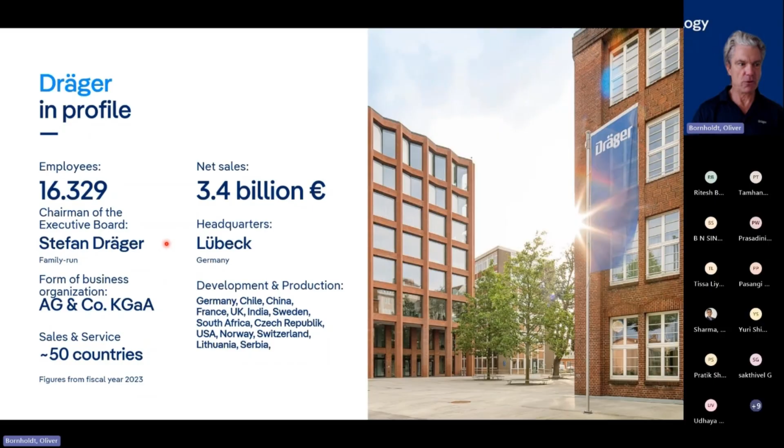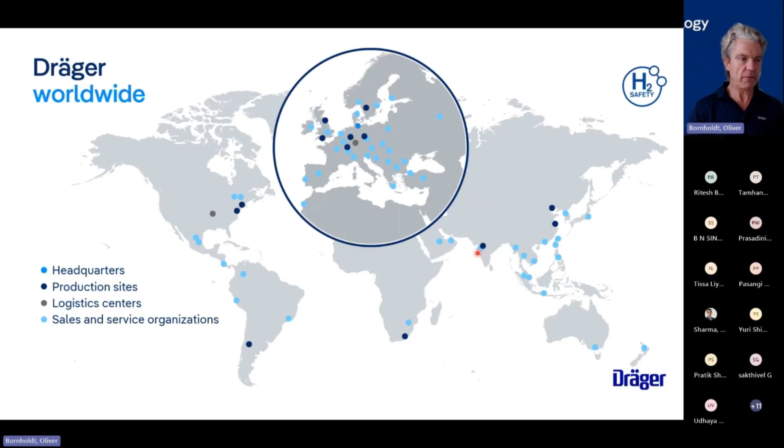So where am I currently? Here's Europe, here's our headquarter close to the Baltic Sea in Northern Europe. As you can see on this graph, we have a lot of production site logistics centers and sales and service organizations, also in Mumbai, taking care of Sri Lanka as well from India, and we are very active in almost all continents.

So what you can expect today, roughly in 45-50 minutes: I give you some overview about the markets, how we see the new upcoming market, and some statistics as well. Then we dive into the production, the hydrogen production, mainly electrolyzers - what is it, why is it so challenging, what do we see - and then some codes and standards, so what needs to be known to really maintain and set up a safe infrastructure.

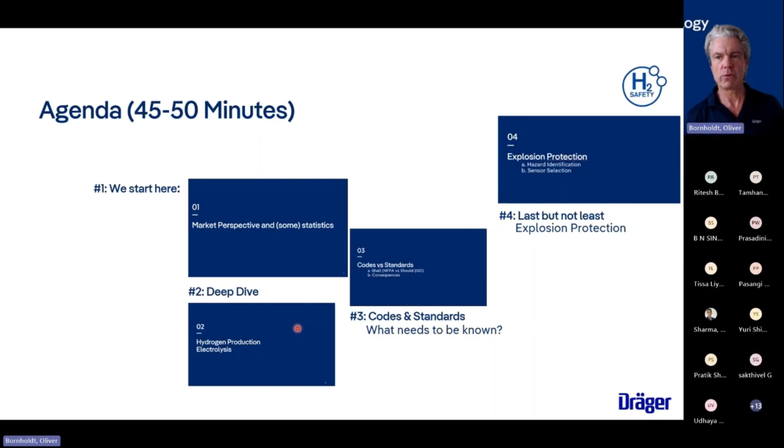And at the end, one thing is what needs to be known, and the last thing is what needs to be known to really make it safe. That means also from the perspective of a hydrogen production facility, what needs to be known to be safe in terms of explosion protection.

As I said, market perspective first - let's dive into how we see the market. So when we look here, let's say in the middle, this is what we are talking about today. We see the main production for hydrogen is electrolyzers. There's also natural hydrogen underground deposits that raise up in some continents, but the major part will be electrolyzers. And around that, a total new ecosystem is currently evolving.

We know this from the past, from centuries away, when oil and gas really influenced our whole industry. Hydrogen, ammonia, methanol will take over parts of it, not everything, because we are still, since decades, dependent on oil and gas. This is for sure. So what we see here is really the whole part of mobility, which is really difficult to decarbonize. One thing is for sure: electromobility, when we talk about trucks, cars, and so on. But it will not solve the whole game.

We see a tremendous amount of projects in the fuel cell business, which also has challenges in terms of safety for sure, but this is manageable. Then we talk about the big part of feedstock for industry, especially the steel industry, which is really looking with big investments deeply into decarbonization. So that means direct reduction furnaces currently deployed.

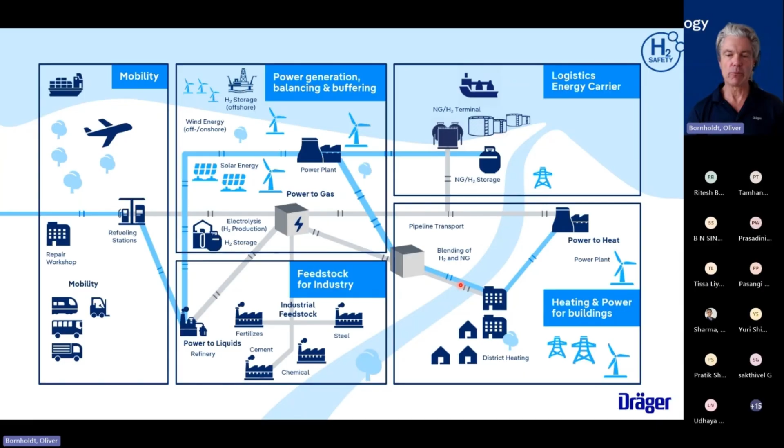The whole logistics around that, especially when we talk about ammonia, shipping around the world is currently a thing that pops up in a lot of projects. And then last but not least, district heating, where we either use natural gas pipelines - we have pilots here in Europe as well - and blend this with hydrogen, or on long term, use hydrogen only. But this is on a long term basis.

So how much and how many projects do we see? Currently, I have with my team here quite a good overview of roughly 1,200 projects, and this is really going up a lot.

You could say, okay, a lot of these projects are really long term, and we don't see them concretely. But this is not true.

We have a database here in the background and a partner who helps us. You see here how concrete they are when we talk about request for quotation, which is a good indicator that in '24 and beginning of '25, a lot of these projects are really going active, and they are huge in terms of total investment volume.

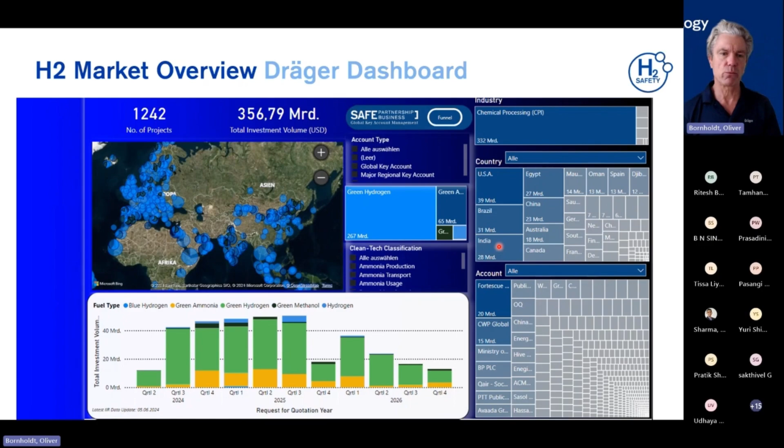So it means really around the world. I was recently in South America, in Chile as well. We see big investors like Fortescue from Australia investing a lot around the world, and India. What we see in this whole region in terms of who is really investing and looking into projects, India and this whole region, including Sri Lanka, is really looking very closely into that. So that gives us a clear indicator: this is not only a buzzword, this is really reality. This is a new reality.

Some statistics - our goal as Dräger is really looking into safety, because this is one of the biggest threats and challenges. When we look at established industries like petrochemical industry, safety is in the genetics - it's part of company culture. When we talk about new industries, also new groups of people who are not so safety aware, that's where education starts.

The sensitivity about new substances, new technologies, definitely needs to be very present. This is currently where and how we are working on it.

There are organizations like the European Industrial Gas Association, which really looks into hydrogen-related production, storage, handling, and road accidents. They analyzed that, and 21 of these accidents - that's 10% - have happened in the last decade. And for sure, purely from the statistics, it will be more because currently the projects are going live in hydrogen.

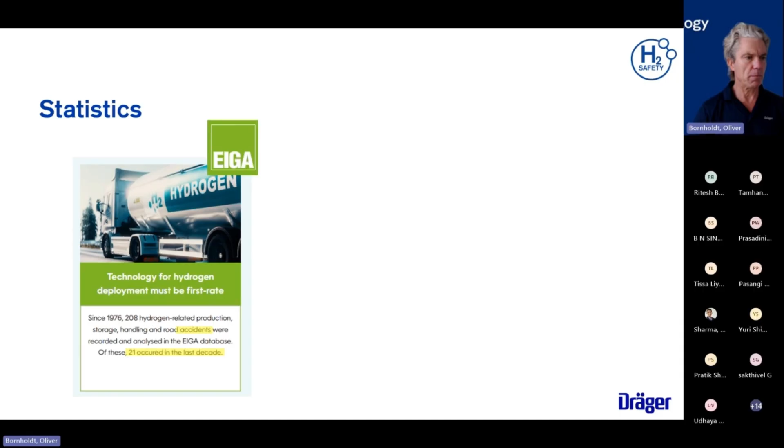Oliver, you went on mute. Oh, now I'm back. I'm sorry.

Thank you. Hydrogen tools, hydrogen safety panel, for decades has really been looking into very detailed analysis. This is what we can take out of these statistics, and taking this information to give you an even better service.

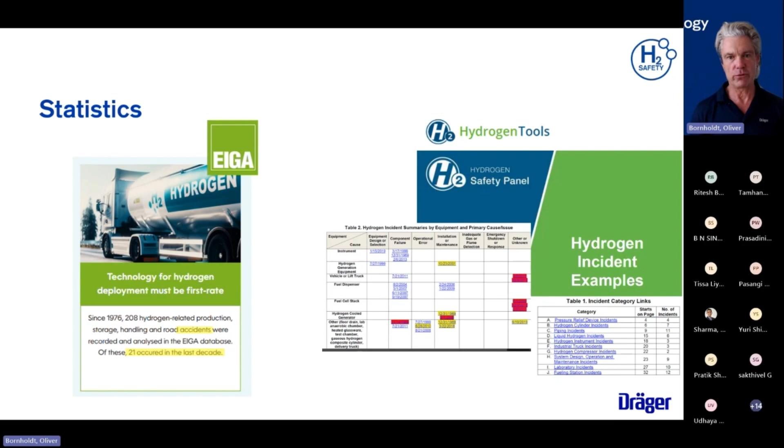Main reasons for hydrogen incidents: we are working with and are a member of the Center for Hydrogen Safety, a non-governmental organization, including lots of companies who have been working in this industry for decades.

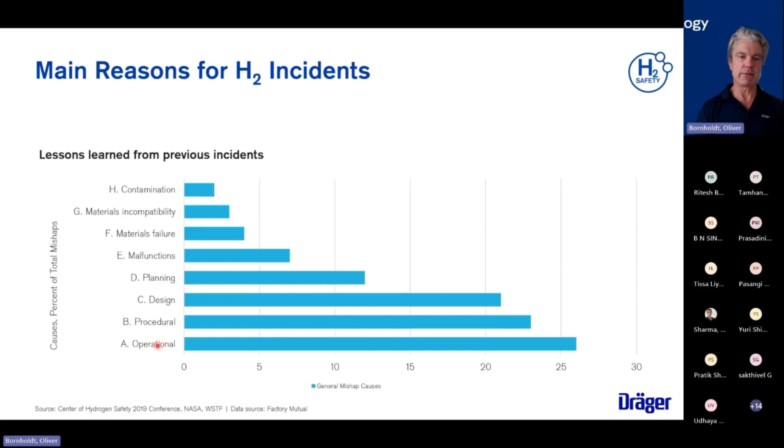Looking a little deeper into that - where in the process it happened - we see it really in the operational part. So when it's going live, when we're doing regular maintenance and procedural operations. But here's also a kind of pattern where we have to look in.

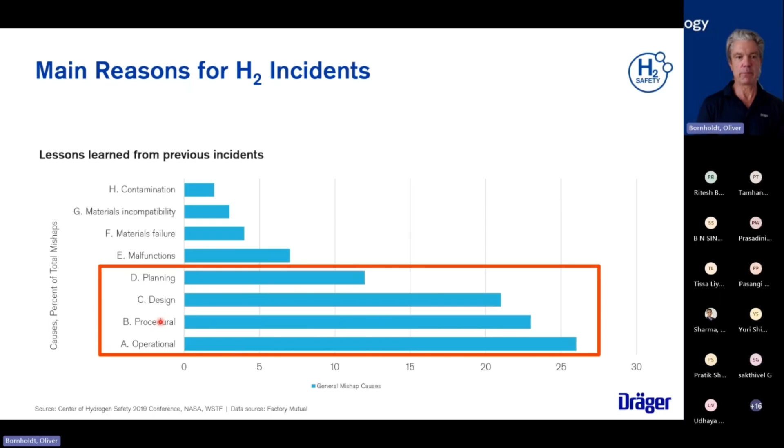You could say, okay, here especially in category A, which is a fourth of all causes - and looking at A, B, C, and D, there's a pattern. This is people-related: either in planning and designing, in maintenance, in ramping up. And this is more related to material, which is also important to know - what kind of materials we have to use.

Failure is also part of maintenance, and hydrogen has some specific behaviors like embrittlement - you may know this. That means also looking into choosing the right steel quality, the right fittings, discs, sealings and so on - it's very important to know that.

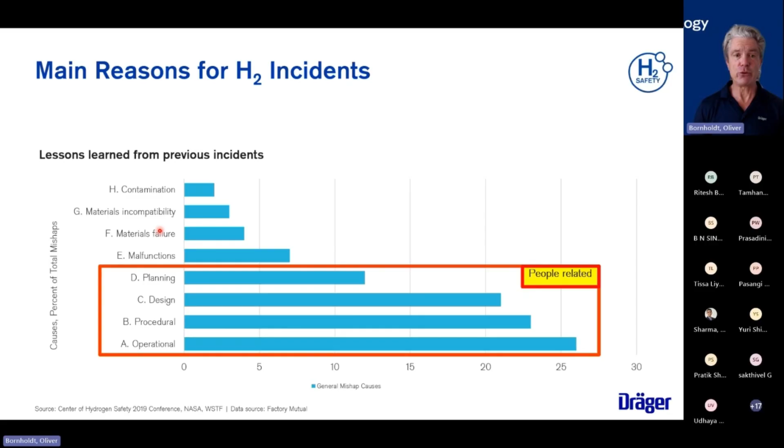Just to give you an overview here about our mission: it's really to educate people so you know what you have to know to start your safe operations.

Interestingly, I'm in contact with a lot of insurance companies because there's an insurance perspective as well. These are big insurance companies who will be in your operations later. There could be local ones as well. I just chose here one, two, three from Europe, which are large insurers, and they see this as well.

I've been invited to some of these risk management conferences in insurance companies, and they're telling the same story: currently, if the risk and the process is not fully understood by the people, also from this perspective, the insurance rates will have to be raised. So that means if you could show that you did everything which is technically available, and this is also your liability at the end, and you could show a proper safety concept which is state of the art, then the operational cost in terms of the insurance rate will go down. And this is where these guys are really looking in.

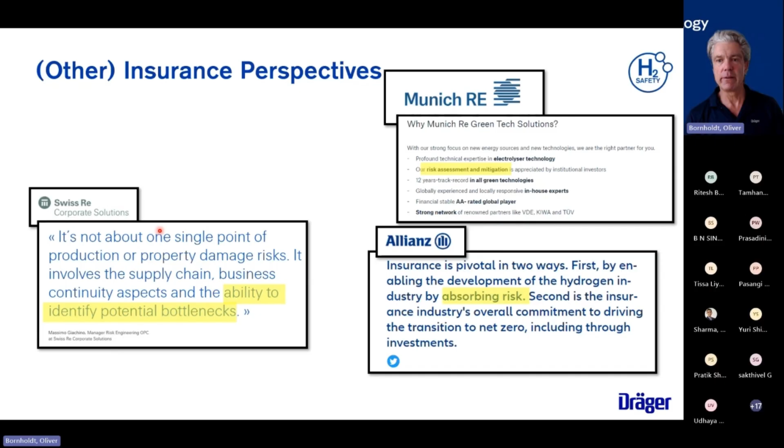The biggest insurer worldwide, FM Global, has published for years a so-called property loss prevention data sheet. There's a new revision from January this year which gives good recommendations on what needs to be known and what needs to be used. There's also a special section about flammability of hydrogen, so there's a lot of new good information. And as you can see, this is not from an industrial peer organization, this is from an insurance company. So that means they take it very seriously as well.

We want to talk today about hydrogen production, that means electrolysis. A little bit going into the history, because this is not new.

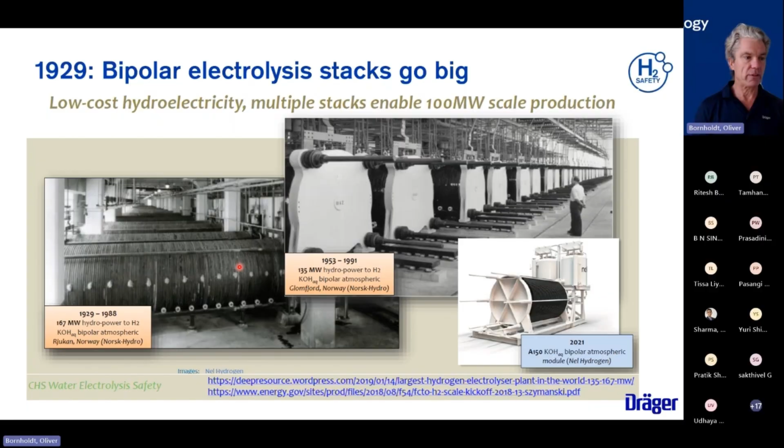As you can see, these are pressed stacks, with membranes in between. And for sure, degradation is still today one of the biggest risks in electrolyzer technology, because when we talk about proton exchange membrane, you may have internal pressures up to 30 bars, so differential pressures, temperatures between 40 and 90 degrees, which is not dramatically high. But for sure the biggest risk in PEM technology, and with alkaline electrolysis as well, which is a little bit different in the technology part, is crossing H2 into O2 and O2 into the H2 stream. And this, as we know from the school experiments, is very dangerous.

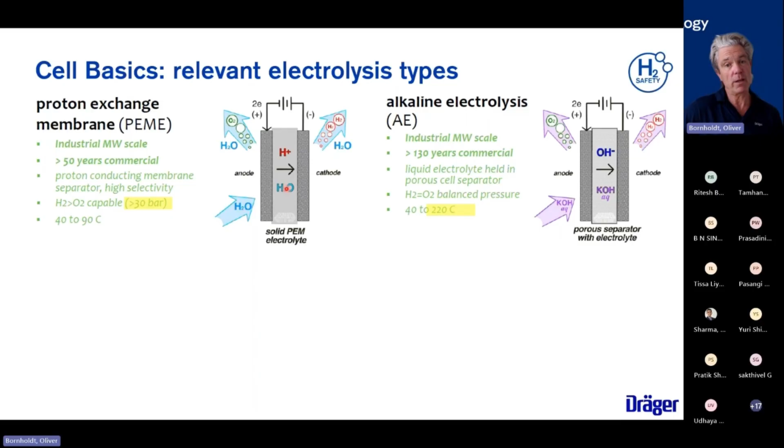So these kinds of things are the biggest technology challenges that all electrolyzer OEMs are currently facing, and we are in contact with dozens of them, really looking deeper into that. But there are new technologies currently in preparation, I would say, for example solid oxide electrolyzers, which is also not new, developed in the 80s, but compared to PEM and compared to alkaline, this has a quite low market share still, but it's going larger. And for example, anion exchange membrane as well, so this will be scaled in the future, and there are a lot more technologies currently being developed.

I'm in contact with some startup networks, so this is very promising for the future, that there will be a lot more, maybe safer technologies as well. But currently, the majority, I would say 95% of all large installations, are either based on alkaline or on PEM. You could ask us, hey, when to use what? There's a rule of thumb. I'm not really a deep specialist here because my home turf is safety.

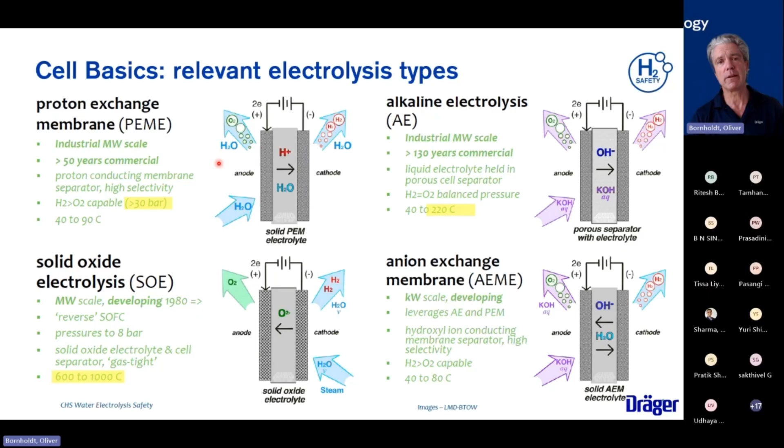PEM is mainly used when you expect shifting energy input, let's say from wind or solar, whereas alkaline is mainly based on having a very stable electrical input. This is the main difference here.

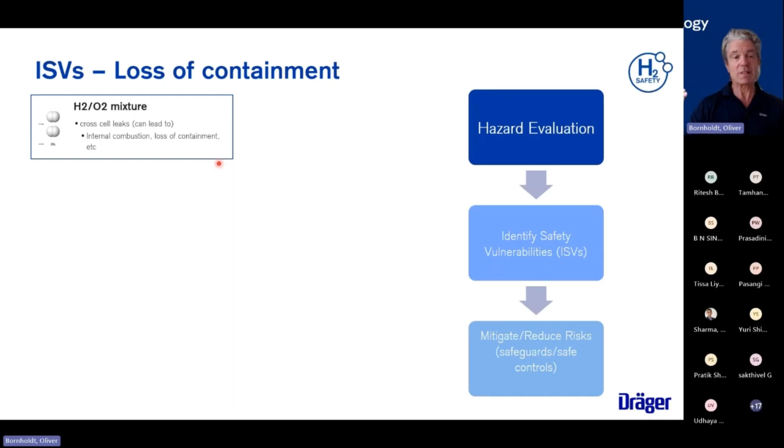So loss of containment, what are called safety vulnerabilities? First of all, you have to identify the hazards. Hazards, as I mentioned, can be an H2/O2 mixture in the electrolyzer, meaning a cross-cell leak, which can lead to internal combustion and loss of containment, because this is something we want to produce, not lose. Another hazard could be overpressure, which can lead to failure of the vessels and components, and loss of containment as well.

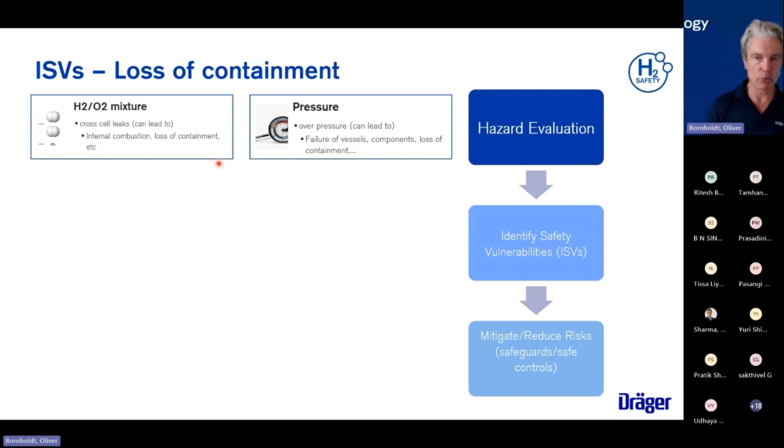We have a liquid electrolyte that can cause corrosion in sealings, in fittings, and chemical burns. We can also have an unintended H2 release into the air, so that needs to be controlled as well.

Either you have a controlled environment for the electrolyzer, like a container as seen in the small picture, or maybe in a building. Some installations I've seen are outside, but there are pros and cons in terms of durability and atmospheric weather or climate conditions on an electrolyzer. So both have pros and cons.

Oxygen release for sure. There is an increased propensity of combustion because you produce hydrogen, and in some installations I've seen the oxygen is just released. If there would be an unintended H2 release, a purging, or an overpressure, it could also cause a kind of atmosphere which is then highly explosive.

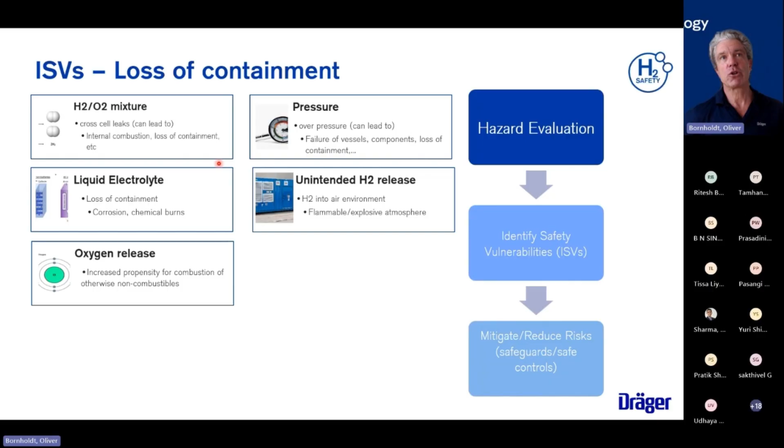Because hydrogen has one big challenge: a very, very low ignition energy. It's over 10 times lower compared to natural gas.

Low temperature can happen as well. Water freezes and expands in some areas - maybe not in Sri Lanka, maybe not in India, but here in Europe, Northern Europe, over winter times when it's an outside installation, it can happen. Electricity, for sure - we talk about high power volumes here, high temperature as well. This is what we also see in outside temperatures, for example in the Middle East.

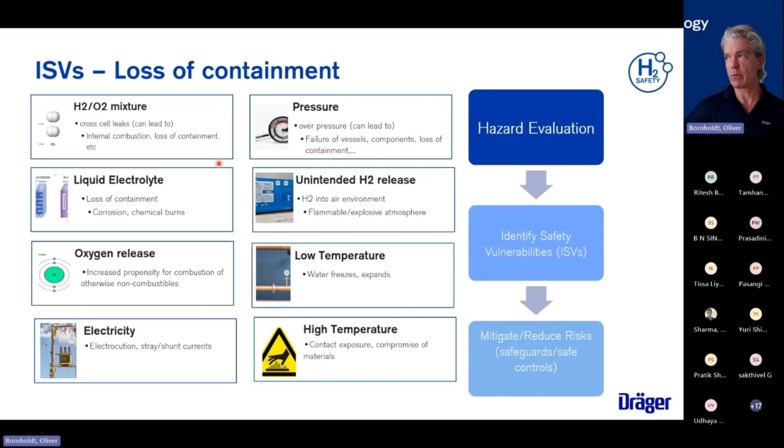Bypassing now away a little bit from the technology - what needs to be known in terms of codes and standards? What is already regulated? What needs to be regulated? There's also a big difference depending on where you get the systems, where you want to install the projects, and with whom you're working together. So there's a big difference between NFPA, North American standards and codes, and ISO and IEC standards for the rest of the world. I will talk a little bit about the consequences of that.

But overall, we all have a duty to protect health and life. Why am I saying that? This is based in your law, also in your national laws. And from a company perspective, at the end, the owner of the company, the CEO, is liable if someone gets hurt or even worse.

So there are basic laws which need to be known, legislations concerning health and safety at work. This is legally binding stuff that you definitely have to know - accident prevention regulations, collective agreements, and so on. Then there's the state of the art: standards, principles, norms like ISO, NFPA, technical rules about hazardous substances, governmental action plans as well. This is given out, and this needs to be known. This is not an excuse not to know about it.

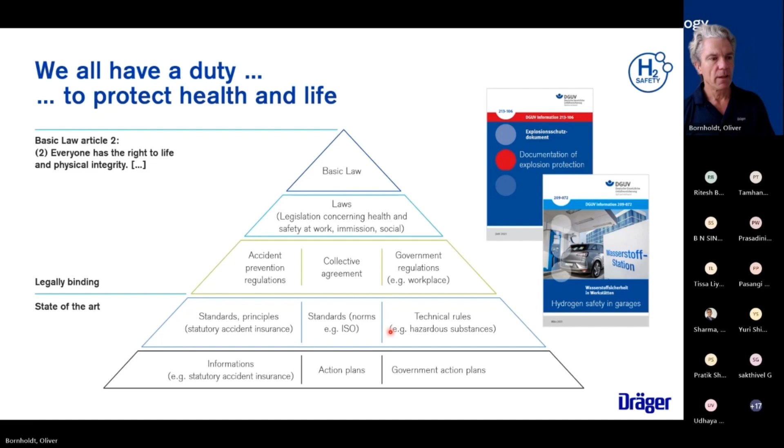The good thing is there's help. When we just look at standards and codes across the whole value chain in the US, you could say, okay, why the hell do I have to take care about US standards? You may get equipment in the projects, and this is normally sourced internationally via, let's say, EPC companies.

That means it could be that these OEMs are really used to using, for example, NFPA. I will come a little bit later into what kind of standards are applicable here, NFPA standards and codes. So when we concentrate on this left part of production, the CSA standards are applicable, UL, and for sure, when we talk about sensors and detectors at the end, NFPA will play a very important role.

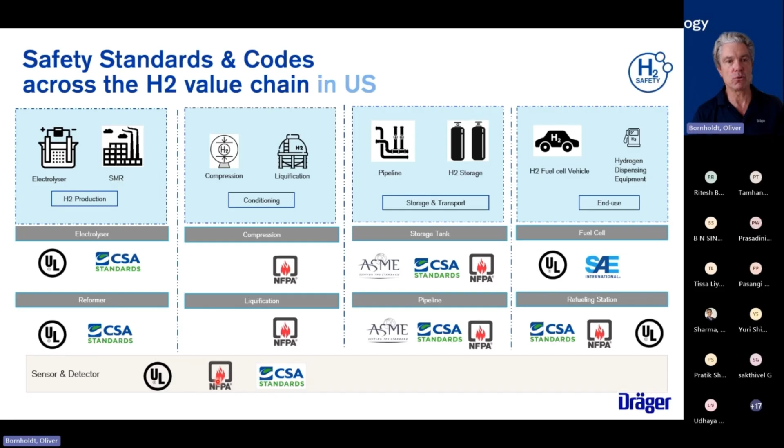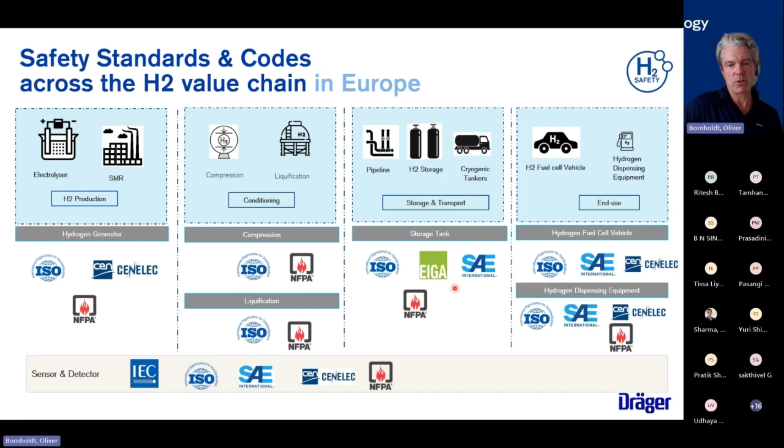Internationally in Europe, or other continents as well, ISO and CENELEC play a role. And as I've mentioned already, the European industrial gas associations have given out codes, standards, and regulations and guidelines as well, which help a lot to plan a proper safety process.

Looking a little bit deeper into one specific international standard, the ISO 22734, which is dedicated to hydrogen generators using water electrolyzers. This is something you definitely have to put under your pillow and look into. This is really a consensus built via multinational ISO processes, latest published in 19, and there are addendums currently being worked on, with working groups looking into additions especially for new applications and new technologies that will come up in the next years.

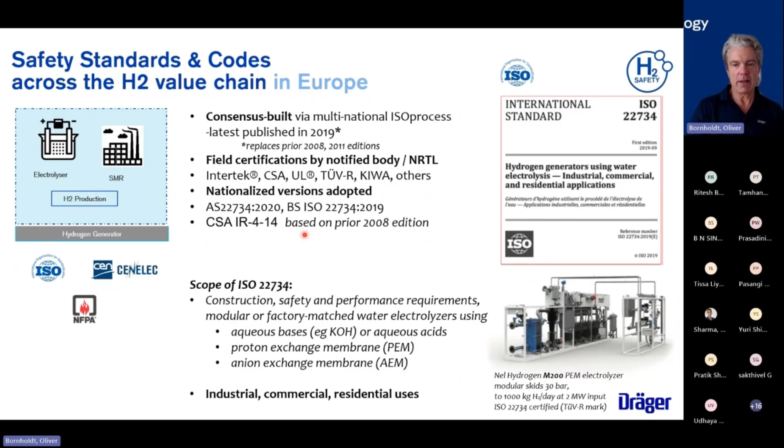So that means PEM, anion exchange, and KOH, which is the third technology that I've mentioned here, for industrial, commercial, and residential users.

Requirements, as I said, operating requirements, the gas quality is mentioned here, specification, very important, how you do risk management and a risk analysis, what kind of equipment needs to be known, how it needs to be certified, how service personnel needs to be protected at the end. Test methods are described here and strongly recommended from this part.

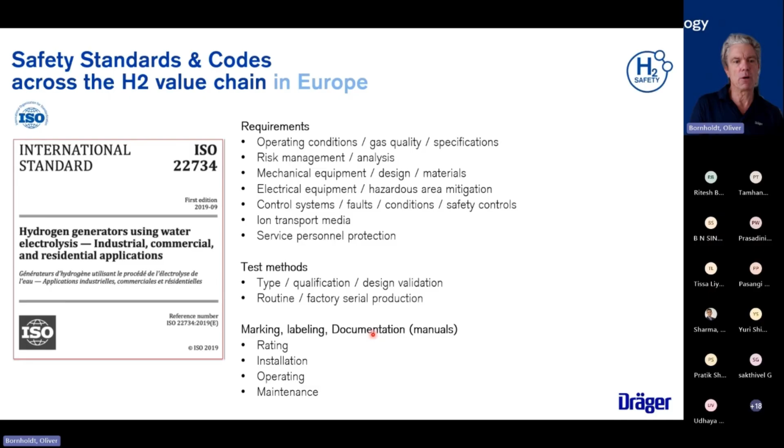And at the end, for sure, documentation. So what you have to have and show an auditor, for example, in terms of marking, labeling, and documentation. So this is really a central document which gives you a quite good overview about what needs to be known, also in terms of safety.

And there's a big difference between ISO and NFPA. ISO states you should do this, so there's a lot of should requirements, versus NFPA is really looking into a shall requirement. That means you have to do it. It's not just that you can follow it, you have to do it.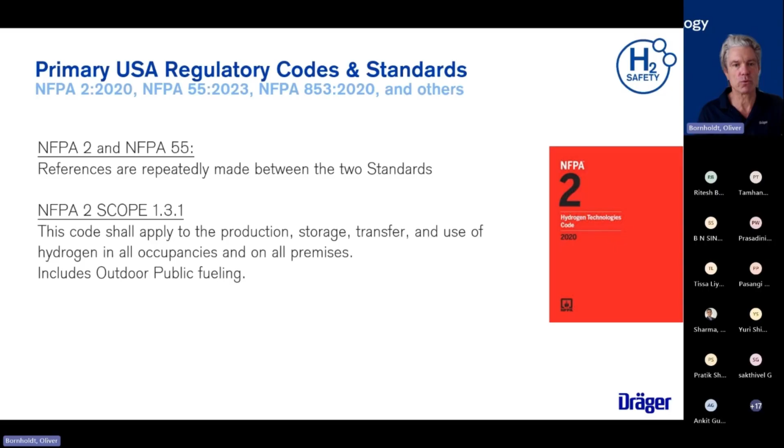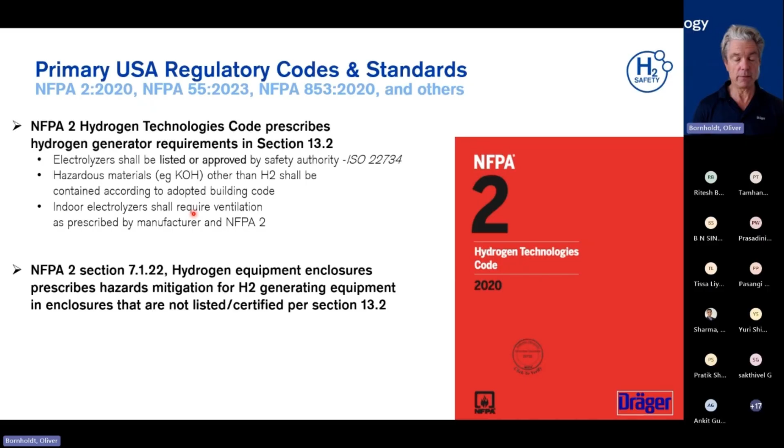Looking into that, these technology codes really prescribe hydrogen generator requirements, so that the electrolyzer shall be listed or approved by a safety authority. Hazardous materials other than H2 shall be contained, and so on. So indoor electrolyzers, very important, shall require ventilation as prescribed by a manufacturer and NFPA 2. All these things are really described in detail here, what needs to be known and what kind of safety, and this is very important, safety infrastructure you have to have. I will come later in my part on explosion protection, what that really means and what is necessary to take care about.

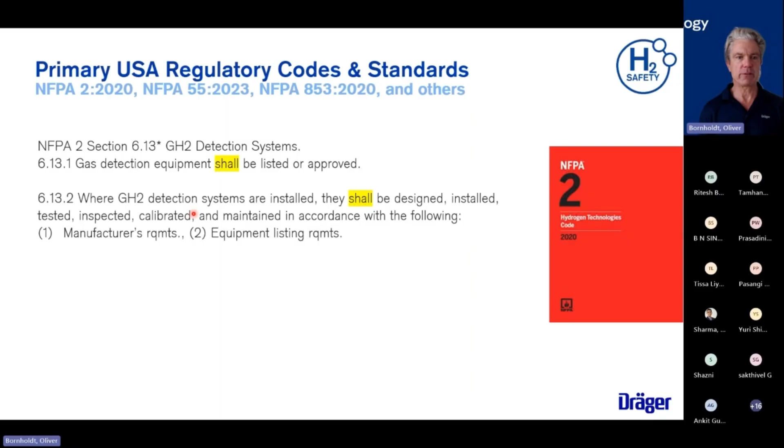Especially NFPA 2 for detection systems really looks into shall requirements. Gas detection equipment shall be listed or approved, and shall be designed, installed, tested, inspected, and calibrated according to manufacturer's requirements. Maintenance, inspection, calibration, and testing shall be conducted by trained personnel. So as you can see, NFPA really states more of a shall requirement versus ISO which is a little bit weaker. You could say, is it good, is it bad? I would say I would strongly go for doing it. Otherwise, if it comes to an incident, you have to prove that you've done everything according to standards.

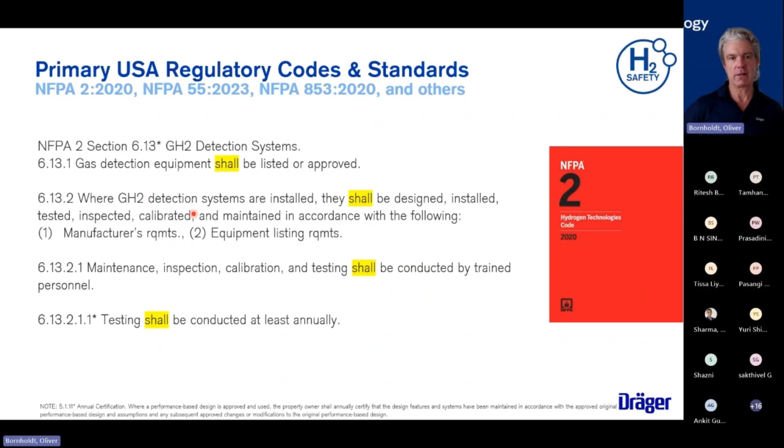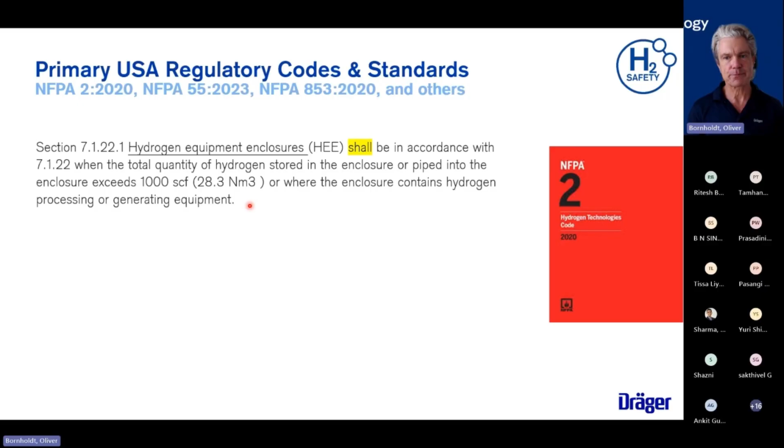Having said this, hydrogen equipment enclosures is also part of that. That means where hydrogen is stored in terms of quantities is described in detail. Where you produce hydrogen, when we talk about electrolysis, you have to store it as well, at least immediately. Maybe you transport it later, but this is part of this whole process as well.

Emergency and shutdown systems, fire detection is definitely a very important part of it. And the combination of gas and fire detection in one system is something which is not only recommended, but also described in these standards quite intensively, and needs to be known here as well.

The type of detection shall be determined by a risk assessment. That means you definitely have to know your processes, who are the people involved, what is your environment, looking really into hazard identification, setting up a proper risk assessment process, and then really looking into the details.

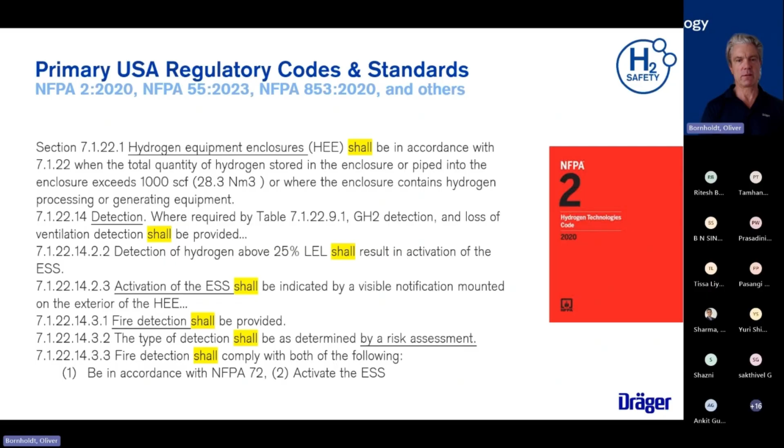At the end, I will come to the part of explosion protection. So what does that really mean in terms of where can I expect the hazards and what kind of sensors can be used here? It mainly starts locally, in your groups, with your safety engineers, with your board of management, with a workshop.

Maybe your health and safety officers, maintenance guys, operation management sit together, and you ask yourselves: okay, we have to identify all new hazards in these new work activities, and we may need new standard operating procedures for this. The big question from management is: do we know all the new regulations and standards?

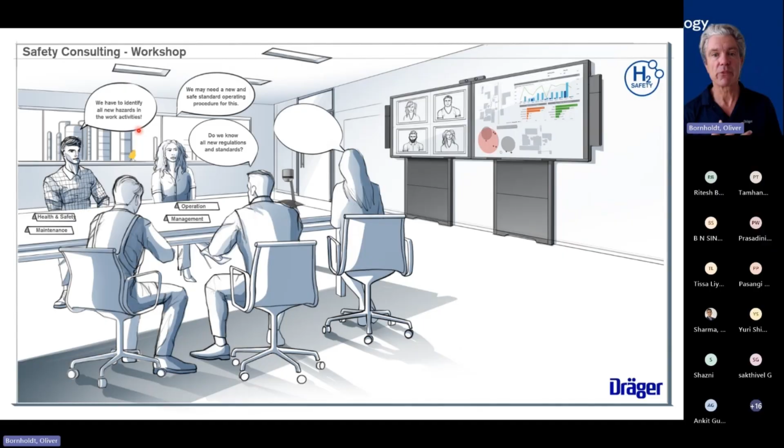Because I'm liable at the end if it comes to an accident. And the big question is how we define our new safety goals, because this is a new process. So what kind of safety needs to be reached? Yeah, this can be done in a risk management process.

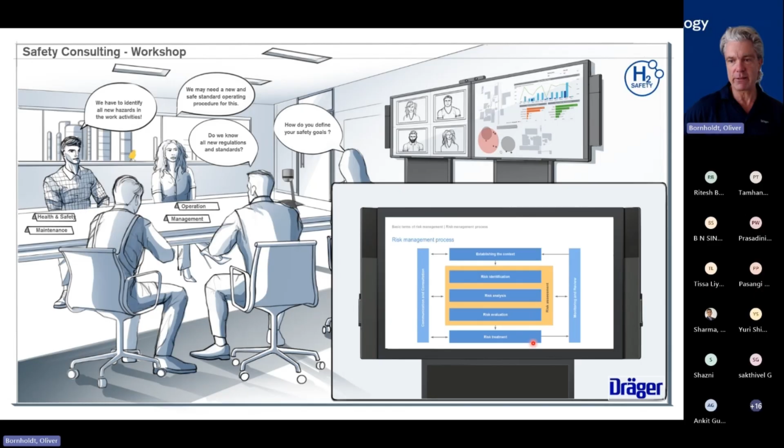Either you do it on your side, or you can pull us in as a company as well. So we do these workshops together with you, really looking into the details: risk identification, the analysis, the evaluation, and at the end, risk treatment.

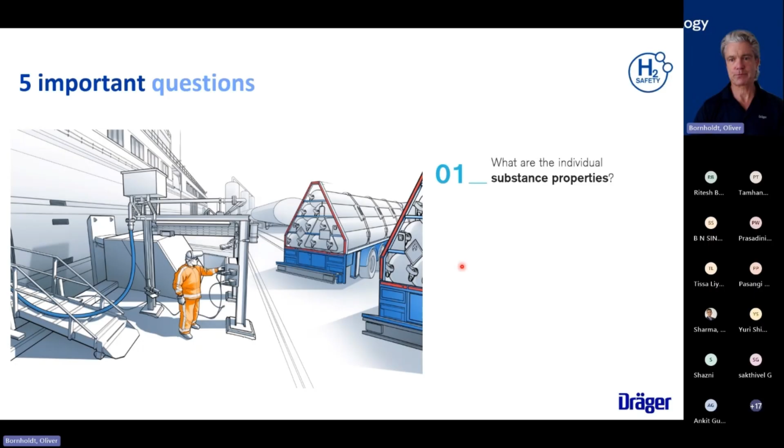So really what needs to be done to bring the risk down to an acceptable level. Five important questions. First, what are the individual substance properties? That means if you use hydrogen, ammonia, or methanol, you need to know what is so different and what is so special.

Second question: what amount of hydrogen do I expect? In terms of storage, in terms of pressure environments, low pressure, high pressure, maybe even liquid. That needs to be discussed in this part as well.

And then at the end, what kind of damage scenarios can occur, either locally or in the environment? Maybe you have public infrastructure around as well. Hydrogen, as I said, has a highly destructive explosion potential, and this definitely needs to be taken into consideration here as well.

What type of activities are performed in my environment? It's just an example in this picture, but there may be other activities. Maybe you're planning to build a hydrogen facility, an electrolyzer, in an already established environment—it could be, as I said, when looking at feedstock for industry, a steel environment.

There may be other activities already performed there. Do they interact with the new installations, with the new hazards that I may have with hydrogen in hot environments in the steel industry?

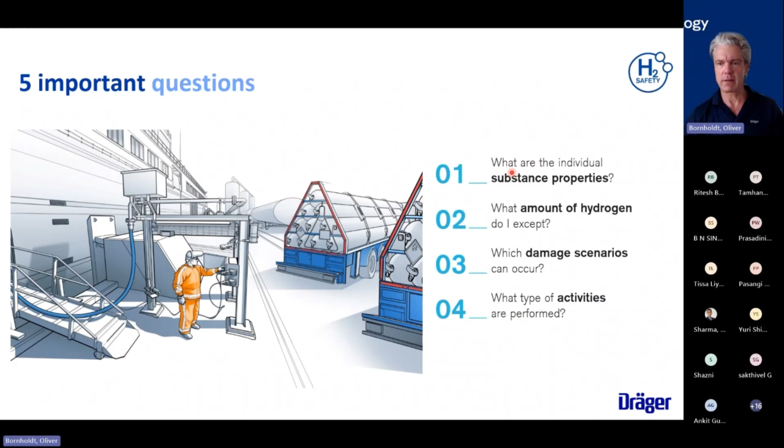Steel was just an example. This year we started to work with the World Steel Association. We have a partnership here and are currently working very closely with a lot of steel companies around the world, looking into the details and proposing and giving out knowledge exactly to answer these questions.

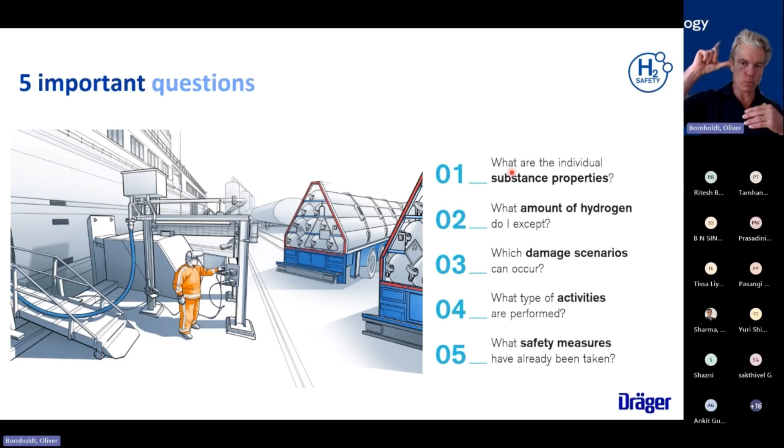Last but not least, what kind of safety measures have already been taken? For sure, you don't start from zero. The question is: is it enough? Or maybe we need an extra layer here of safety management.

So how is this done? When we see a planned life cycle from concept over scope and risk, you're looking into the requirements, planning, scheduling, then the construction. This takes a long time, and where and how safety will play a role.

What I can tell you as a rule of thumb: the earlier the better, also in terms of costs, in terms of identifying hazards, and discussing the safety goals at the end, reflecting the current standards and codes that I've mentioned in my presentation.

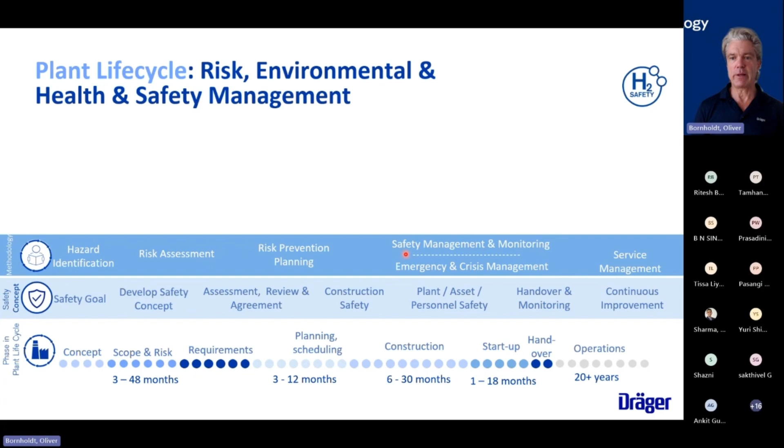And then you develop a concept, you assess and review everything, and for sure the risk prevention planning, the training of staff and so on. Emergency and crisis management is part of it, especially for management, if it comes to a larger accident risk, which can happen, but you need to be prepared. Also, everyone exactly needs to know who to work with, what needs to be done, not to get in panic, so that really everything is described in processes.

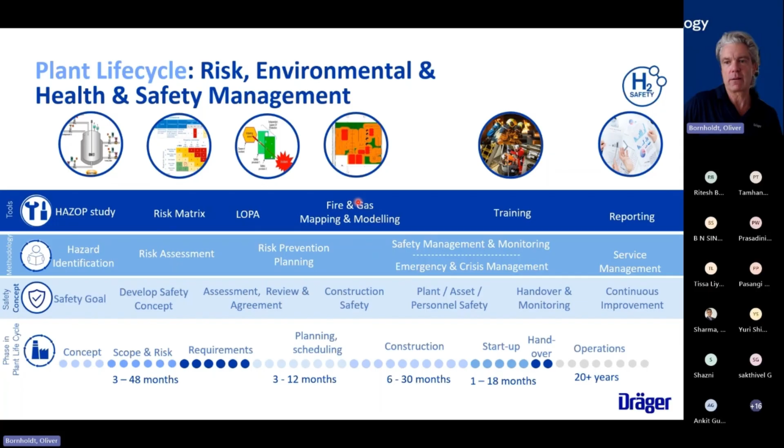Yeah, what kind of tools can be used? Definitely today I cannot look into the details, like risk matrices, like LOPA, HAZOP studies. You may know a little bit about these tools already, but these are standard tools that are used, especially when we talk about safety concepts. Fire and gas mapping and modeling is a tool which we use very often, and I will tell you why and how this is done. For sure, training and reporting, no doubt about it.

Explosion protection. There's a primary explosion protection. Primary means preventing already explosive atmospheres. So that means for sure preventing gases from leaking, no doubt. If everything is gas tight, we don't have an issue here. We have to remove gases quickly.

That means ventilation systems, for example, maintenance, purging, and so on. And you have to detect gases quickly. So that means the earlier you detect, the lower the probability that you get into explosive atmospheres. Hydrogen starts from 4 volume% in the atmosphere up to 75%. So that means everything below 4%, let's say the earlier the better, then you can trigger measures already. This is the reason why gas detection is a primary explosion protection measure.

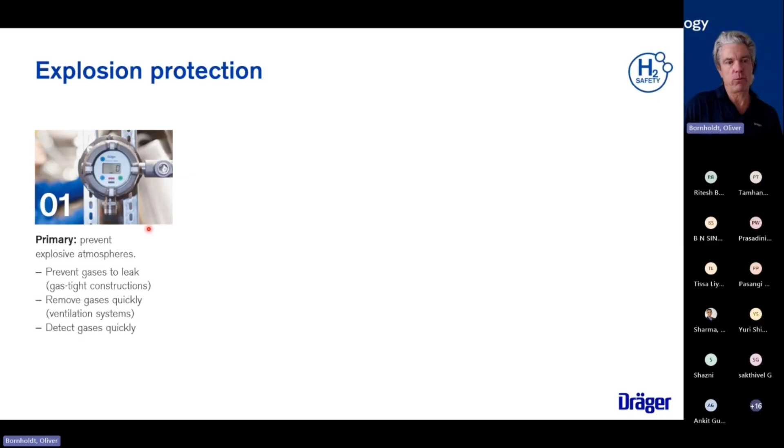Secondary is preventing ignition sources. So, for example, you have an explosive atmosphere. If it doesn't get ignited, then let's say you don't get an incident. So certified equipment for sure, mechanical instead of electrical equipment. Why is this mentioned here?

Steel industry, for example, I've seen projects in the mobility part when we talk about modernizing trains going from diesel to fuel cell. They have to be maintained somewhere. And in most cases, these kind of maintenance facilities, large halls, are old. So it means they have a lot of mechanical equipment, maybe on the roof, or electrical equipment, which is not Ex-certified. So that means also here you have to look into the details. Maybe you have a leak somewhere, it goes up to the roof, and there you have an old electrical installation, which can maybe ignite the hydrogen cloud on the roof. So that means you have to detect on the roof, have detectors on the roof, really to mitigate this risk as well.

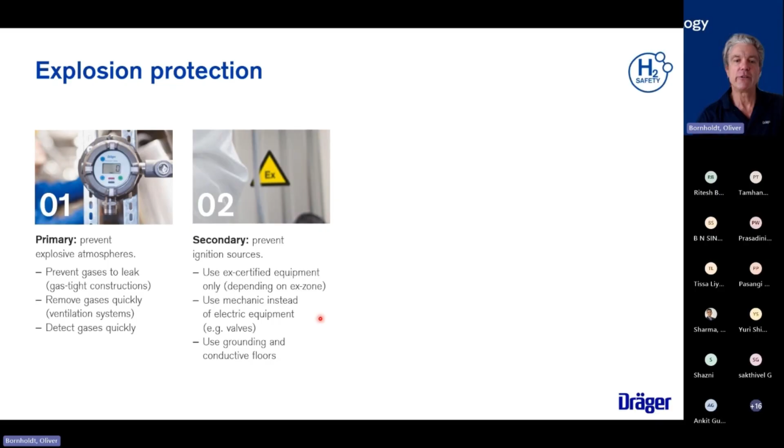The tertiary, last but not least, constructive, so really prevent and reduce damages if it comes to an accident. Retardant materials, pressure relief valves, areas, roofs as well, evacuation marking ways. So at the end, gas detection is a primary explosion protection measure as it really prevents explosive atmospheres in the first place. That's the reason why this is so important.

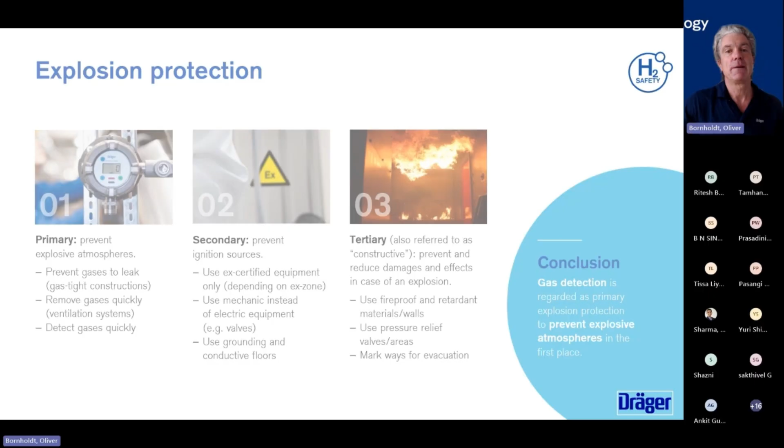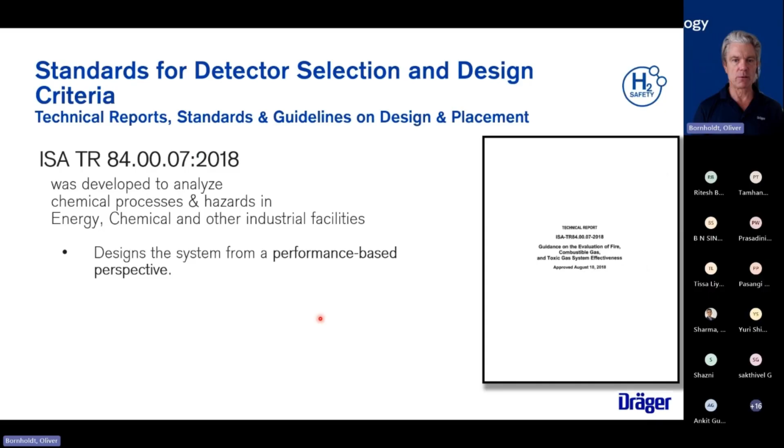Standards for detector selection. This is a document as well, which you have to put under your pillow. The ISA TR84, the guidance on the evaluation of fire, combustible gas, and toxic gases. It was to analyze chemical processes and hazards from other industrial facilities, designing systems from a performance-based perspective. You can see here that everything is really related to risk reduction factors as well. So it gives you a very good guideline on what needs to be known and how to do it.

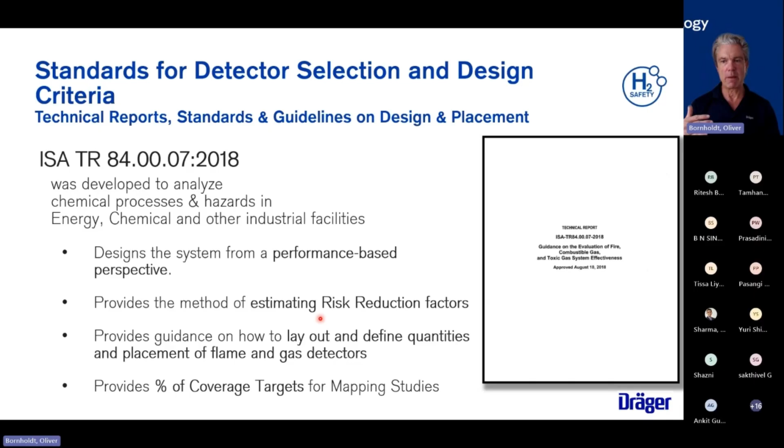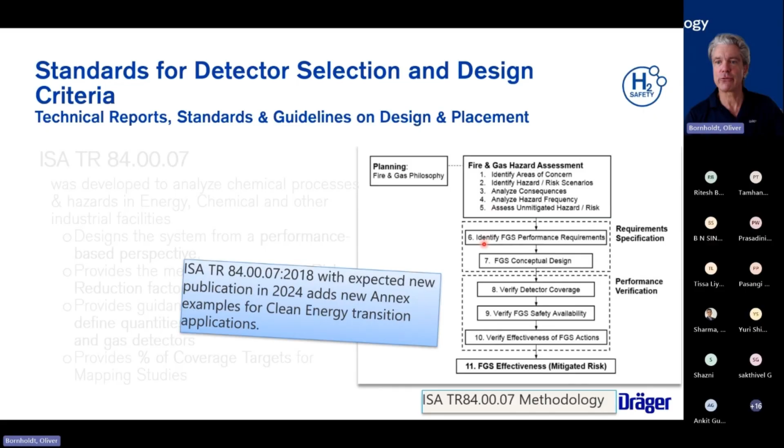It's really more the how, the layout, the defining of quantities, and placement of flame and gas detectors. So it gives you, let's say, a percentage of coverage targets for mapping studies. And there's an addendum currently out in '24, which really reflects clean energy transitions. And as you can see here, this is really from a fire and gas philosophy, a combination of all the different hazards and the mitigation of that.

Having said this, I've mentioned this already, fire and gas mapping, what is that? If you do not know, and if you have maybe a new application or a quite complex environment, you can simulate that. And there are tools out which are industrial, completely accepted. It gives you safety compliance here, and safety compliance means: do I choose the right amount of detectors, the right detectors responding to the hazards as well?

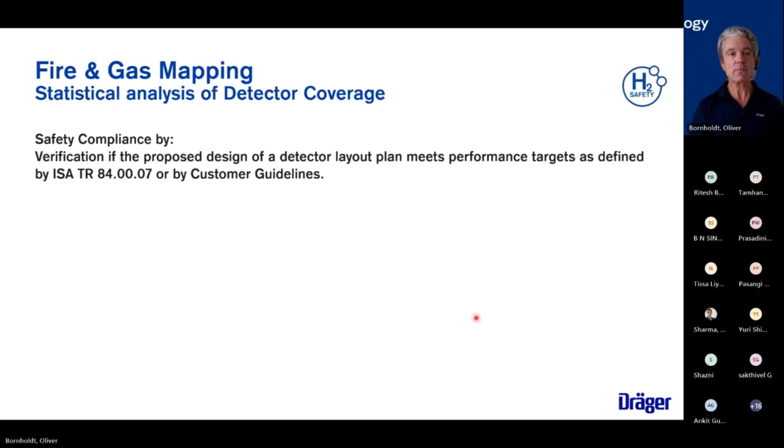And this can be simulated. So the big question is: what detectors will respond to the hazard? It means I need sensors capable of detecting hydrogen. And where should these detectors be positioned?

As I said, hydrogen has very special requirements and behaviors in terms of dilution, in terms of leak - when you have a leak, where and how you can expect gas clouds and so on. Outside, you may have wind direction. So you definitely have to know where I need to place my sensors.

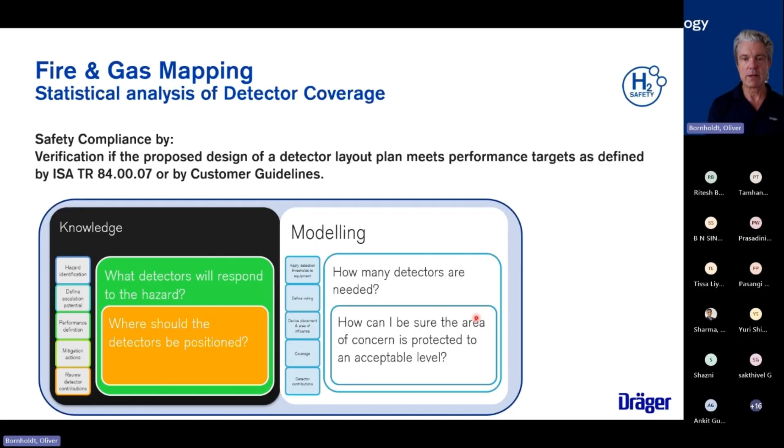And at the end, you can model it - how many detectors are needed. We talk about costs, for example. And how can I be sure that the area of concern is really protected to an acceptable level? This is done through an input document.

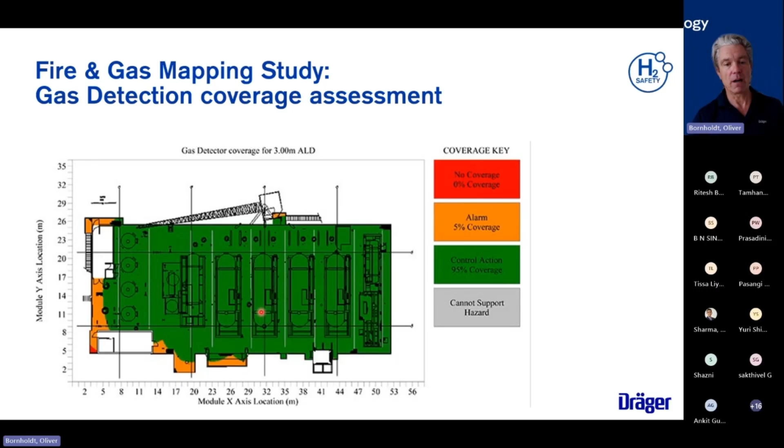You see here, for example, a tank area. You simulate that. You put in detectors based on the knowledge that you may have, and then you simulate that. You get a coverage where you say all concerned areas are safe from this simulation. The same can be done for flame detection - same input, and you can see where and how the protection environment is built.

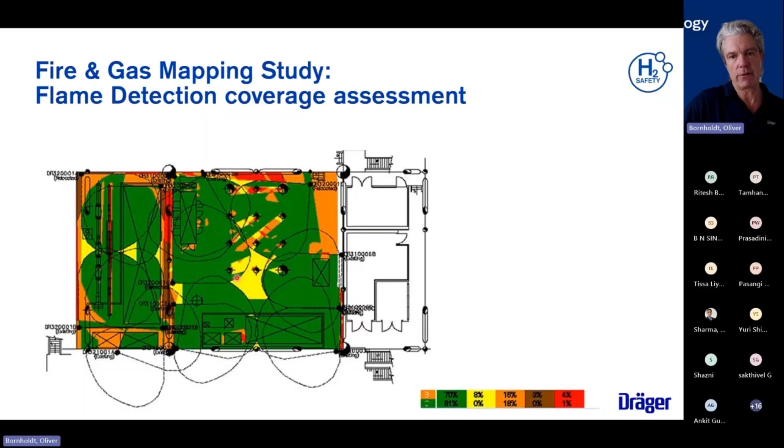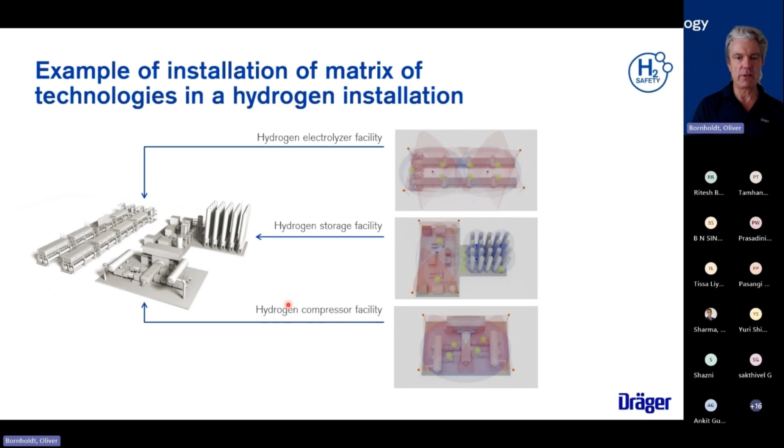When we look into something concrete, an electrolyzer facility mainly includes a storage facility as well, or a compressor facility, which is mainly part of it. Looking at an example of a larger hydrogen installation - it could be indoors, it could be outdoors. It doesn't really make a big difference here. So where and how to install systems.

One of the most prominent sensors and sensor technologies are ultrasonic leak detectors. I have no time today to go into details, but ultrasonic detectors listen to a leak. That means the gas doesn't have to come to the sensor, which is a big advantage, because we talked about high diffusivity - hydrogen is a very light gas.

But in hydrogen, a pressure leak produces a certain sound, a whistle, and this whistle can be detected by a microphone. So this technology is available, accepted, and it's one of the most prominent early leak detection technologies.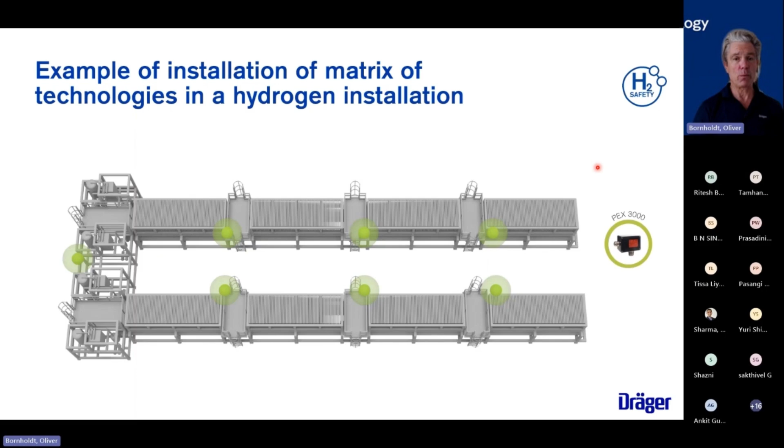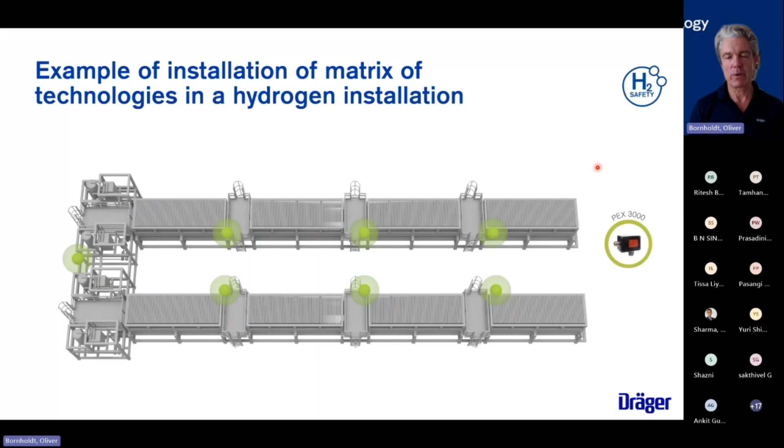On top of it, we see catalytic bead sensors, especially in areas where, out of the risk assessment, we expect maybe a high probability of a leak. This is the second layer of safety you would put in here. And the third layer is then flame detection.

Here also hydrogen is a little bit special. Hydrogen flames, you may or may not know, are not visible in daylight. You would hardly feel it if you had a hydrogen flame a meter away from you - you would not even feel it on your skin. It hardly emits IR, so you need a special camera, a flame detector, which very concretely looks into a hydrogen emission band, with also a very low false positive rate - the lowest false positive rate in the market.

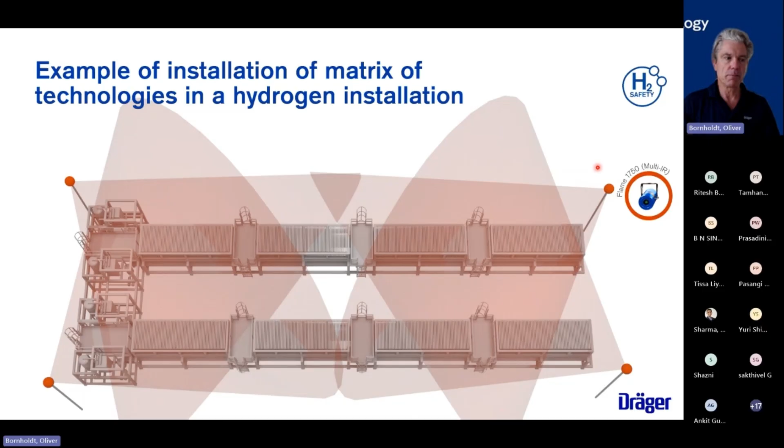So we are definitely a technology market leader here, looking into that so you have proper flame cameras around as well. All this together gives you the detection safety infrastructure. All these systems are combined in a system which gives you triggered alarms as well, emergency escape, and all these things will play a role.

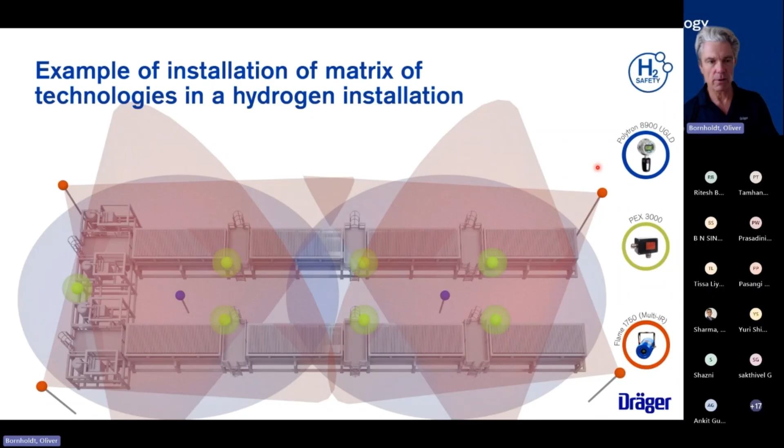So that means at the end, we have to trust the technology compared to other gases like methanol or ammonia, for example - our nose is quite good. But with hydrogen, it's totally different. It's odorless, it's invisible, so we have to trust technology.

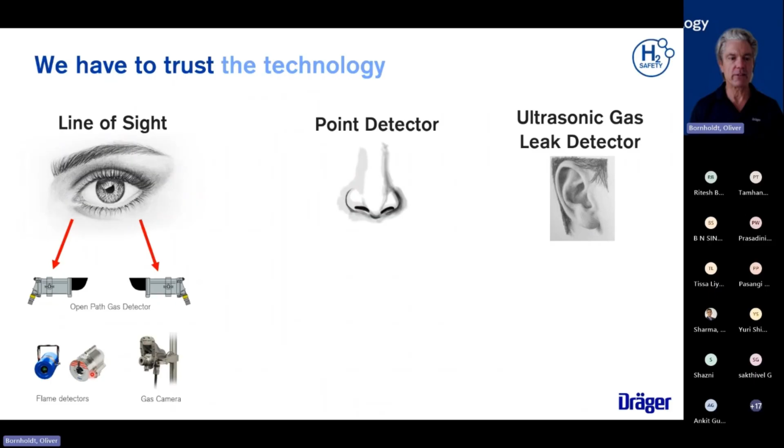I've mentioned flame cameras, so we definitely need to look into that. We need point detectors - that could be catalytic bead sensors, what I've mentioned here. And last but not least, we can listen to the sound - we have ultrasonic gas leak detectors.

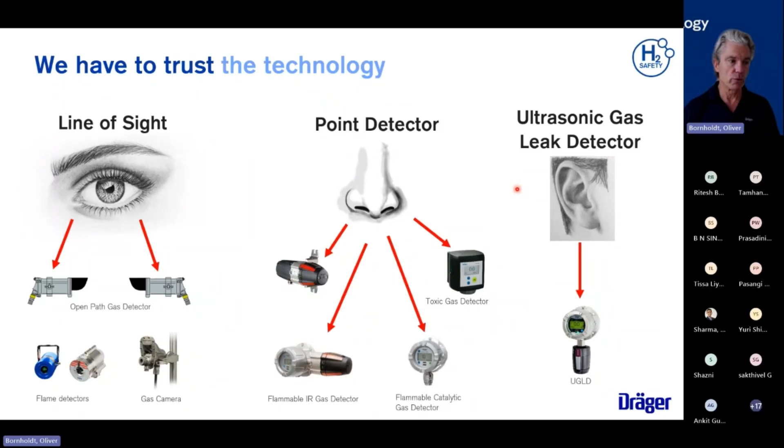So this combination of sensors could be part of a fire and gas mapping, could be part of a consulting, could be an outcome of your risk assessment. And this is definitely what needs to be known. Having said this, that was my overview.